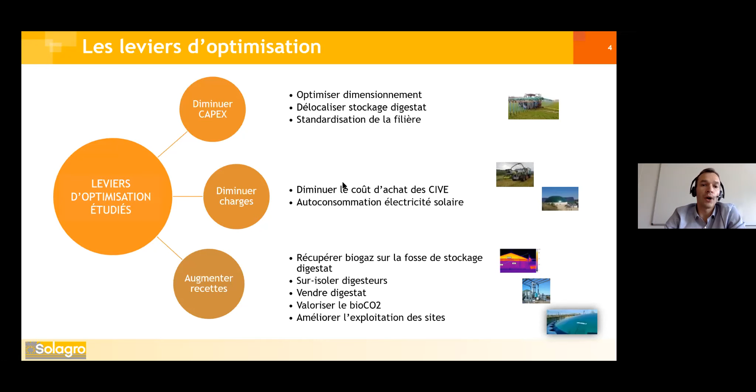Now, to understand the impacts of these different optimization points, we've worked on some standard cases, with ratios for investments, load, revenue, so different standards concerning inputs and technology. Number one, for example, this corresponds to 11,000 tons, diversified application, with manure. You can see the amount of methane that would be injected, 80, and a project that without a subsidy, in conditions of the purchasing price, well if we signed the contract in 2022, it's not at all feasible without using some kind of driver.

So this is a basic project, but we can test different drivers using this project. The second standard case, 24,000 tons this time, so 120 cubic meters in terms of injection. So we've got different types of manure, different types of animal waste. So think of the scale. So we've improved things. We've got internal profitability from the invested capital. In this case, that's another driver.

So case 3, 36,000 tons. So this is the limit of our authorization, with half liquid manure, half intermediary crops, with injected gas, again in liquid form. So at 4.7%, the result is better.

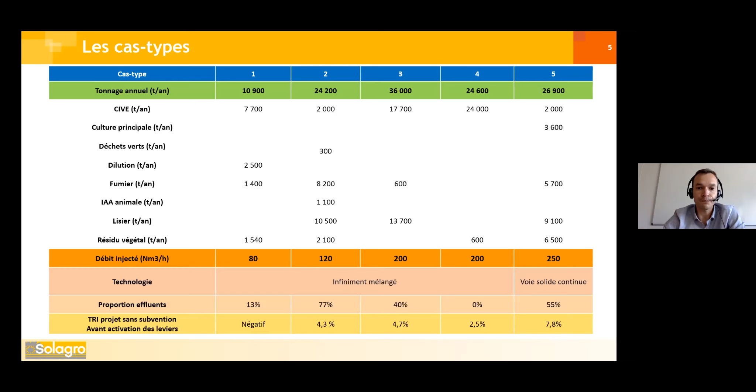So next slide, please. So once we've tested everything, the 12 drivers that we worked with for the 5 cases, we've got this kind of diagram that positions each driver on an axis. We've got the impact on the TRI, and the impact of the driver on the capex, on the investments, whether positive or negative. The area covered by each driver depends on the amplitude of the financial impacts on each axis for the different standard cases. So according to the standard case considered, we've got an impact that can be positive or negative, more or less advantageous.

There are certain drivers like use of insulation layers or a gasometer. That's quite close to the intersection of the two axes. This represents a low investment. There's little capex, so this means a better TRI, and as the return time for this investment is 3 to 4 years generally, according to us, it's advantageous. It's a good idea to use it to have a more sober installation in terms of energy use, so it maximizes its energy efficiency in terms of the gas injected into the network. So it's not a driver that alone would allow for something very profitable, but it's one of the components of a more relevant kind of project. So economically, it's advantageous.

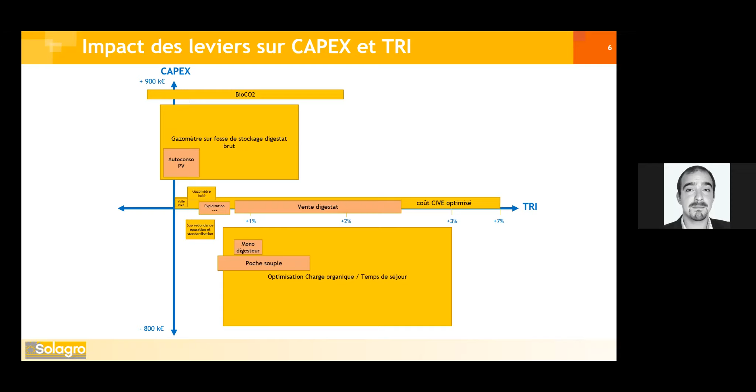So just a couple more minutes. Yes, certainly.

So this is a summary table of the different drivers that can be combined. So it gives us a debt coverage that is above 130%. So this can satisfy banks. The DSCR is the relationship between the BE, the excess, and the reimbursement of the debt. So it's the ability of a company to have an operating margin that is big enough to cover its borrowing. So if it's 130%, it means that even if the expenses and revenue are different by 30 points, the project can continue because of the time to pay back the loan.

The good news is that it's possible to have financial feasibility for all standard cases. It doesn't matter what kind of cubic meters we're talking about. So we've given priority to the most realistic drivers, the simplest ones to implement. So we've got 8 drivers for small projects for 80 Nm3 per hour. If it's not possible to achieve 15%, it's better to look at sale of digestates or at how to use intermediary energy crops, or the use of external funds so that there isn't too much payback time for the loan.

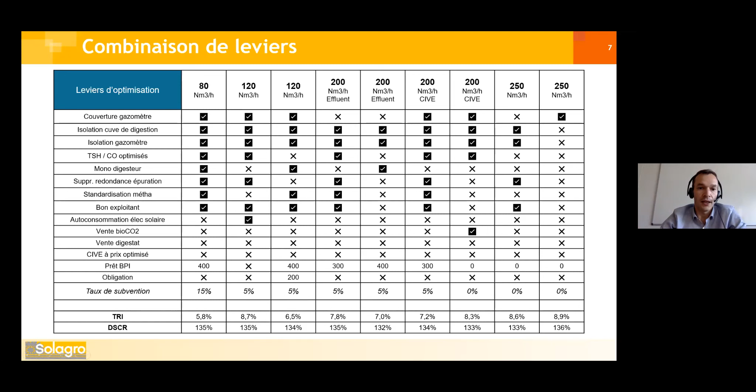So for 250 Nm3, we're looking at 8.6% in terms of efficiency. So by playing with the different parameters, you can find the right kind of efficiency. So we've talked about sale of digestate, but this has to be analyzed on a case-by-case basis. It's very theoretical. So we haven't applied any ADEME subsidies or regional subsidies. This would mean adding a specific factor.

So you can have combinations of enablers to provide profitability for the different standard cases analyzed. Some enablers, some drivers require additional investments and therefore more equity. That's why it's important to look at co-financing solutions with participatory funds or institutional funds or even private funds to diversify the situation. And then there are enablers that involve all sector stakeholders, design offices, etc. Everybody is involved in the activity. There we are.

Thank you, everybody. Thank you, Jérémie. Thank you for shedding light on that situation. So these are ideas that should be investigated further. There's a question about performance.

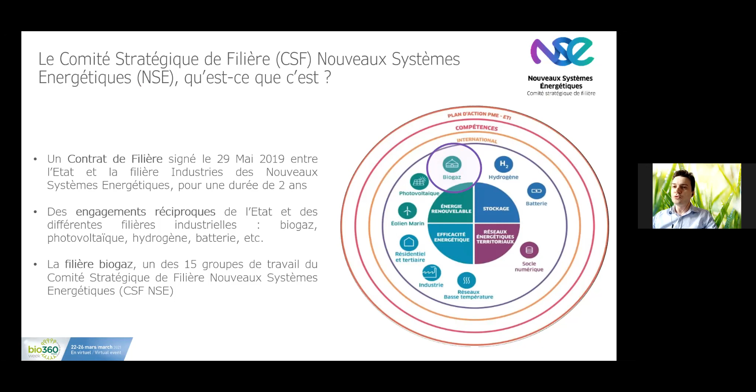So very briefly, let me go into detail on what the Sector Strategic Committee is all about. Since May 2019, we've had this committee in place, and this has been formalized by the signing of a contract between the biogas and methanization sector and the state. And we have a certain number of commitments regarding how we can monetize the externalities and also all of the different efforts we can make in terms of innovation.

Within the scope of this, we have a specific industrialization working group that aims at structuring the sector through innovation, looking to guarantee competitiveness. And we're looking to find tangible pillars that will enable us to invest and know what we're investing in. Now, this industrialization working group is open to all of the methanization actors and all those actors who would like to contribute to the building of this work. There are many actors who are already involved, but it's a very open-ended organization. So anybody else who would like to join can.

To move on, why is competitiveness so important? Why is innovation important? Well, because we've got over 8,000 production sites for biogas in France at the moment, but there's a massive queue as well. There are people banging on the door, literally. There are over 1,000 projects for gas injection.

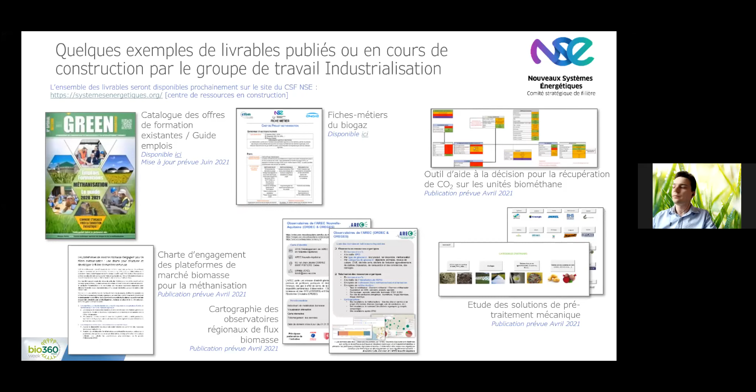Now, another point I wanted to stress was an approach that is underway. It's a cross-cutting approach that we share in our different working groups, whether it's for valorization from CO2 to biogas or the entrants. We basically want to highlight the approach that is called the design to value. There are other sectors in the automotive industry and the nuclear industry that have used this approach,

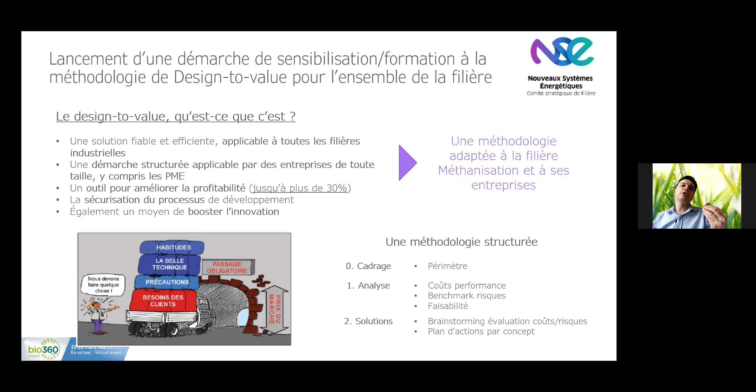and also a certain number of companies have applied this, and we're looking to apply the design to value in the methanization industry because it enables us to valorize and showcase our product, to guarantee that we structure everything we do more successfully. So through this industrialization phase, what we want to do is to enhance the democratic nature of this approach for each of the actors. We're basically saying we've currently identified that there are lots of levers out there, but maybe you, the actors out in the field, the OEMs, or all of the people who exploit and run the methanization plants, you too can think about your own ways of reducing the production costs.

And in order to implement this approach and to guarantee the democratic nature of this approach, we work with Utisa. Utisa is a firm that is specialized in design to value approaches. It's basically all about value analysis. And so what we're doing is we're giving access to this approach via webinars, online conferences that last for 2.5 hours. There are 8 of them.

You can sign up for a conference. You just type methanization and Utisa on Google, then you fill in a form. The initial sessions are already full, but there are still 8 remaining sessions that you can sign up for. It's open to anybody and everybody. It's totally free of charge. And it means that each actor who is interested can basically buy into this kind of approach to the sector. There you are, Mickael, that's all I wanted to say.

Voilà, merci beaucoup, Sylvain. Thank you very much, Sylvain. Just a quick question concerning design to value. What about the training courses? You said it's open to operators, to professionals who work in the sector, people who work in the construction sector. Have you got typical profiles? Yes, maybe I was a bit too quick. I only had 10 minutes, so I didn't go into detail.

Who are the main actors for whom this design to value approach is valid? Well, it's mainly those who build the methanization units, the OEMs, the design and development offices as well, that can be very interested in this approach. Also the operators, the project owners, because all the questions in these training sessions can be very relevant. It's important to optimize the project products, whether it's the CO2, the methane, or the digestate. And the same is true as well in terms of the costs and in terms of cost reduction.

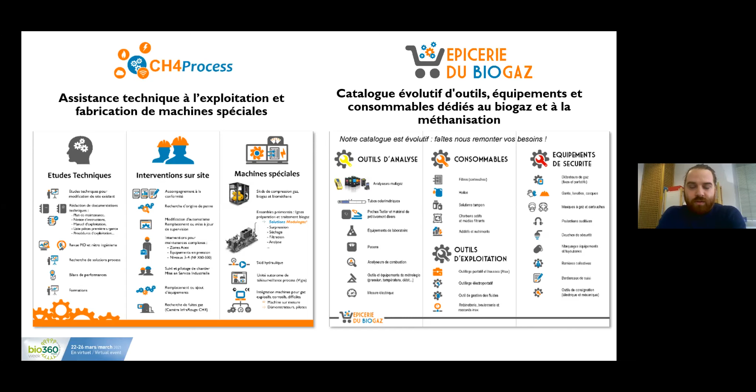Another specific feature is that we propose all of the tools that can be used for performing the analysis. And so we've set up a brand so that we can manage all of the trading part as well for consumables. If you have any needs in terms of analyses on consumables, it's not our main target, but we have a certain amount of know-how. So that's what I wanted to say by way of who and what we are.

Well, why am I speaking today? It's because we're working with AAMF and GRDF to work out whether or not it's possible, when it comes to optimizing the cost of the installations, to work with specific specifications so that as many design and development offices as possible can intervene to see how we can make savings on the maintenance costs and on the electricity consumption side of things.

So work has been done to draft standard specifications so that the operators can consult design and development offices, and our work was to test the solution on 2 sites to see whether the specs live up to their expectation and whether they actually help.

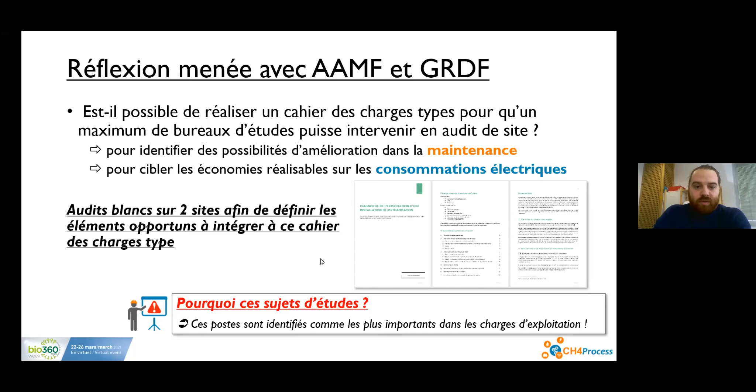What is important before we go into detail either on maintenance or the electrical consumption is to prepare the audit sufficiently. When we work at the different sites, we've realized that often what's important, first of all, is to spend time collecting information. This can take up an awful lot of time, and for an operator, before they call people to come and work at their site, it's a good idea to gather together all the documents that might be of use. All of the data has to be up to date.

The electrical diagrams, for example, the prevention plan is important. If we send somebody to your site, you have to provide them with all this information. And if possible, it's good to give all this information in advance, sending by email. Why? Because all the work that can be done over the phone beforehand to prepare the intervention on the site simply saves on time.

And it means that when we get to the site, we're not discovering everything. We've already got a lot of information that we've been able to prepare. I stress this because this is a point that is often neglected. An audit is a good audit if it's well prepared. Next slide.

Concerning the maintenance aspects, let's have a look at the initial operations that we've been able to carry out. First of all, we identified the critical equipment.

There are different ways of doing this. We, for example, used the PIEU method. It means that when you visit different sites, for each type of equipment, you can allocate a score, and that way you see whether the equipment should be considered critical, ordinary, or non-critical. There is a grid, an evaluation grid with a certain number of points that can be used. You can see how important the equipment is, whether it's likely to break down, and the degree of wear.

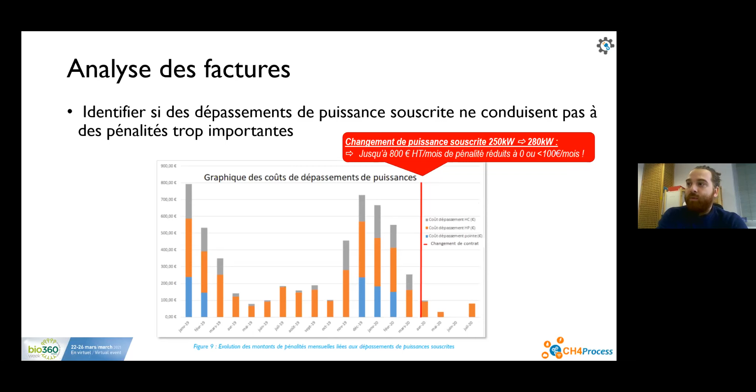There's another aspect that's important and easy to look at: the CSPE, whether you can be exonerated in France or not. The CSPE is a contribution to the public electricity service, and units that produce energy can be exonerated from it. It's important to be careful because when you have methanization related to a farming activity, only a percentage of what you produce can be exonerated.

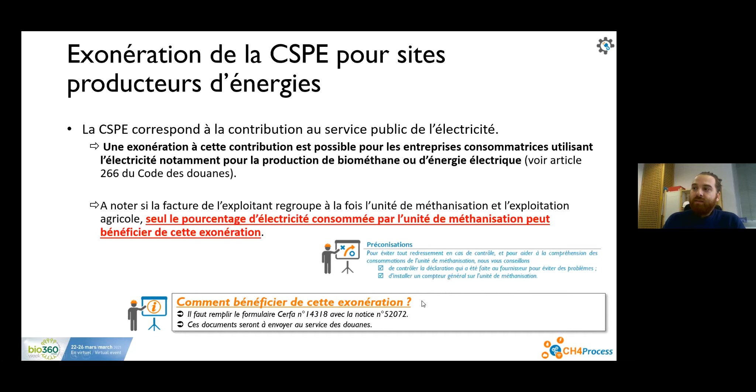But this disappears pretty much once you've changed your contract. So these are two ways of adapting so as to make considerable savings. I repeat, this is why you need to check that you've always got the right contract.

Your electricity contract has to be fine, not only during the startup phase of the unit, but 3 to 5 years later, you might need to ask yourself the question, should you change your electricity contract? The rules might change, your consumption might have changed. It's all important.

So we also performed a certain number of electrical measurements. This was much more focused. Here we could measure the energy consumption. We've got cases that record the consumption by different machines, and we measured the cycle for each of the machines, the effective power, the installed power, and also the intensity at the different phases. That way we were able to identify where there were any gaps.

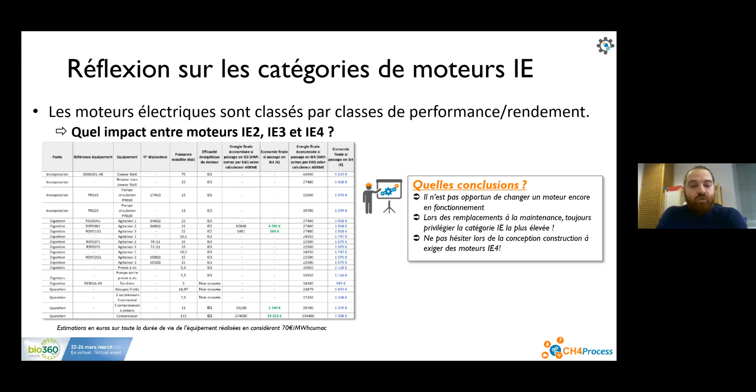But when the maintenance team arrives on the spot and when they're looking to potentially replace the motor because it's been damaged, then it is important to stress that you need to have the highest category possible, i.e. 2, 3 or 4. And for those who are still looking to design a site, it's important maybe to pay a little bit of extra money that the builder will request for an IE4 engine, because the impact on the site will be quite major over the years. The impact will be quite major, but it's not sufficient to say we're going to change the motor, replace it if it's already up and running.

Okay, just very briefly, we have a certain number of examples of anomalies or areas where we could optimize what we do, thanks to the maintenance analysis, but thanks to our analysis of the electrical consumption. We noted that in 2 sites, 2 of the stirrers used a massive amount of energy, and that particularly during the startup phase, they consumed a lot of electricity.

This can come from the fact that they've been poorly adjusted at the level of the speed drive. It can be due to dirt that has got into the vat, but basically this simply enabled us to say very clearly, these 2 stirring devices are the first 2 things that are going to break, so that's why they need to be monitored.

Next, there's another point that was quite interesting, and this was worth several thousands of euros potentially, or even more. We were able to observe that the gas compressor used too much electricity, and when we looked very closely, we realized that one of the safety valves, the pressure safety valves, was leaking. And once you've got a safety valve that is leaking, well, you have to work upon the leaks. And we saw that we went from 76 to 72 kilowatts. So hence we avoided part of the gas from being lost.

This is an important issue because if you're able to analyze the different types of energy consumption and what is not normal, you can make savings directly by correcting things. We could have used an infrared camera, but what we often see is that there are leaks from these outlets, these safety valves, and you can't necessarily send in an infrared camera, not into the hot gas anyway, but you can still potentially have the problem. This was interesting, quite an unusual problem, but it's the kind of thing that we identified as being a potential problem.

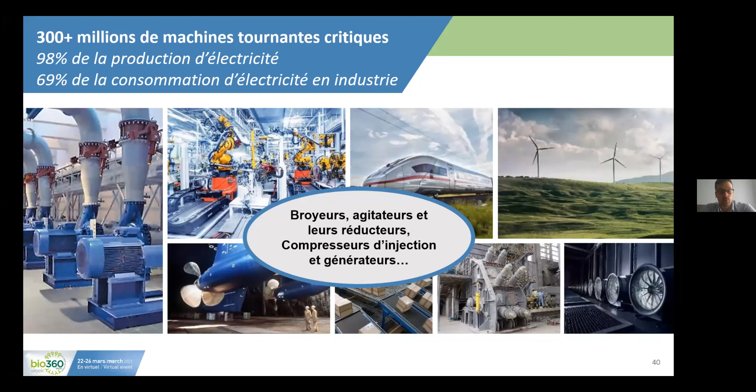And on the next slide, we can see some of the figures based on a wind farm. There's usually very good availability, 97% availability. So 97% of the time they are running, but there is time where a wind turbine is not working.

And there are a certain number of unplanned events, so generating different emergency actions with parts that have to be changed. And this means that electricity cannot be produced. So if we transpose this problem to biomethane, similarly, there are going to be a certain number of machines that are critical and others that are less critical. So there's a matrix that was presented with the machine criticality just before. So it's a good approach to have, to know what machines are critical for your operation, the ones that are going to cost the most to repair.

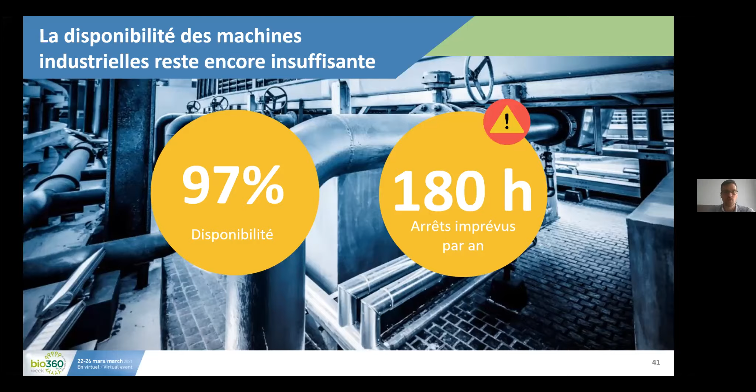So there are a certain number of alterations linked to the state of health of the equipment that is being measured. So it may be linked to the state of health of the electrical part, so the electricity, speed drive, a stator that's damaged, or you can have alterations linked to the mechanical part of the system. And I'm going to go into details in the next slide. So everybody's saying, oh yes, it makes sense. You know, I realize that I can monitor the electrical health by looking at these signals,

but for the mechanical side of things, for the bearings or alignments, here's an analogy that we often use: the cyclist who has a wobbly wheel. So the cyclist will feel that the wheel is wobbly. So it's something that he knows is there, but he has to push a little bit harder with his legs, so provide extra torque. And this is what happens in a motor, basically. For example, if the machine is slightly off, it will have to provide higher torque. So that's what we're measuring in a very specific manner. So we look at high frequency and high resolution to do this.

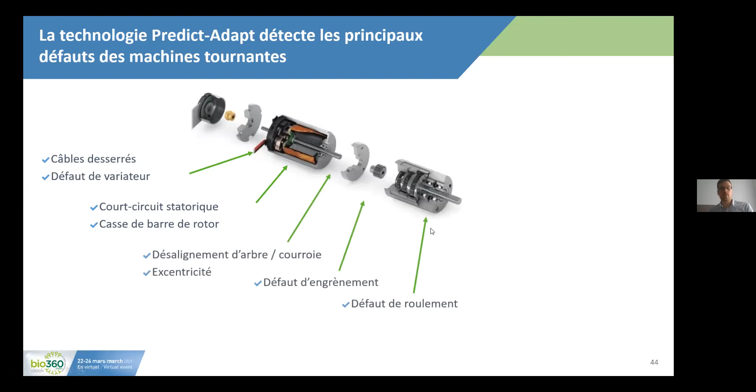So on the next slide, as we will see, there's a whole range of different signatures that we are familiar with, that are pre-established. They allow us to identify the start of breakdowns like electrical signals. But if we continue, we can have mechanical signals and process signals for certain machines. So for example, here, if you look at the last part, we've got cavitation that can damage pumps.

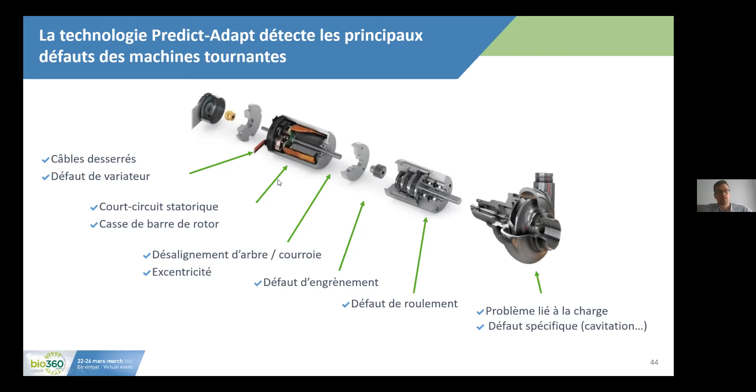So the idea is to detect the precursor signals, so defects in bearings, for example, and then let the operator know, give them notice and give them the opportunity to organize maintenance operations, keeping in mind that there are some defects that can get worse very, very quickly. So that's the idea, that's the challenge that we wanted to tackle, to give a sliding rule for these different defects.

So you've got a physical part, you've got the machinery, you've got three current transformers that are fixed around the power cables of the machine. And then in the electrical cabinet, you install an electronic box. It takes just 15 minutes to install. You don't necessarily have to stop the machine. It really depends on the machine.

And then the box acquires current, and it processes the signals locally and then sends the indicators to our web platform. And this web platform is available to our customers. So the customer can view the state of health of the machinery, see how it's going, see what the trend is of the different health indicators over time.

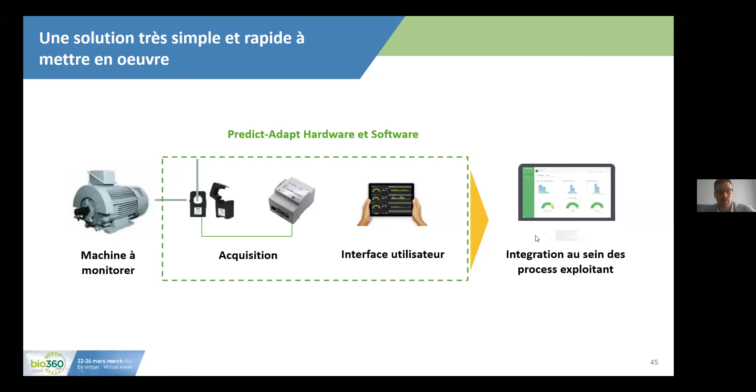So here's an example of this interface. So it's designed to be fairly simple to use. So we know what the machine is. There are gauges from 0 to 10, and they represent the state of health of some part of the machine. So there's a gauge, for example, for the bearings, there's a gauge for the stator health, and that gauge, if it goes into orange and red, that means that you have maybe short circuit problems, and that's something that has to be dealt with, because you're going to have a flash and the motor will stop working.

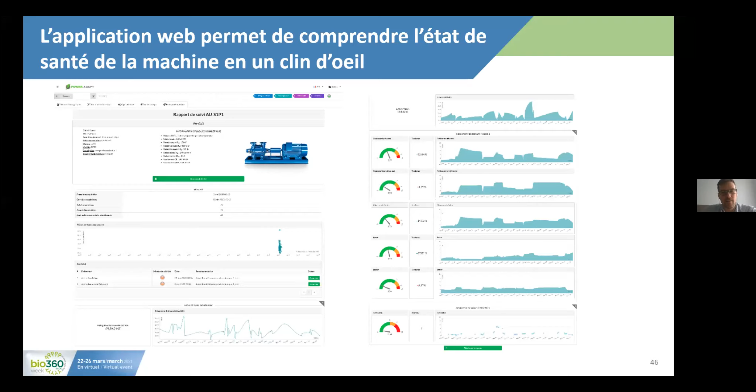So the solution, if we just want to summarize things on the next slide, please. So it's fairly simple, this solution. It's easy to install, it's easy to use, and it can be used continuously on a machine.

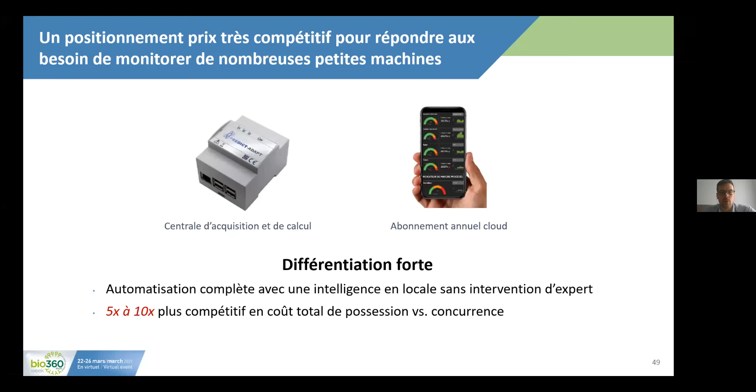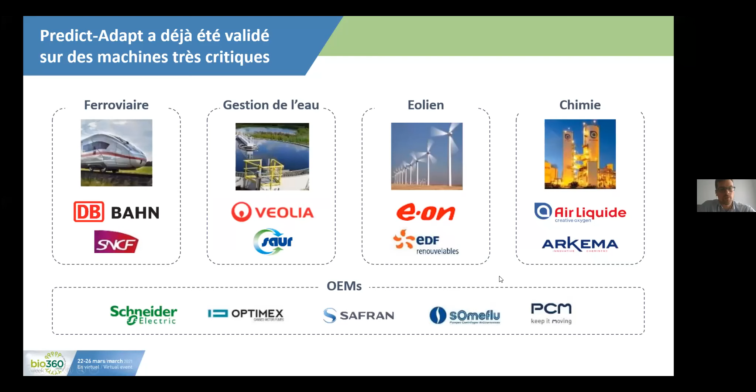What we're hoping for is different use cases. So if there's the start of a breakdown, an electrical breakdown, for example, with a flashover in a stator, we'll try and let the operator know ahead of time and say, okay, be careful. We're seeing some short circuits on the stator. There's something that needs to be changed.

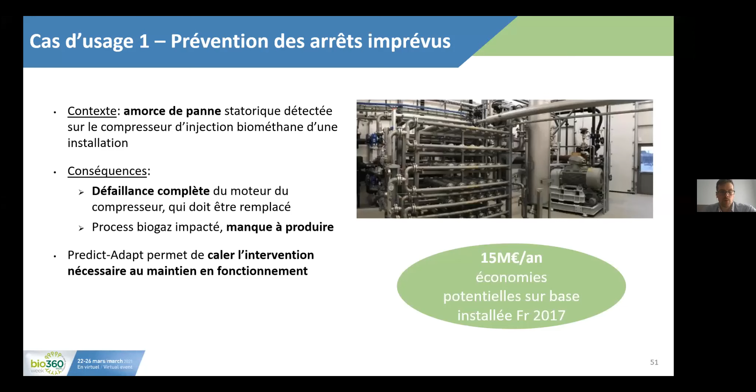So if we extend that to the whole sector, certainly there will be economies of scale to be had. And of course, we have to know the details of each installation. But one thing is sure, if you have a production shutdown that lasts for several days, installing this kind of box will be very quickly amortized. So I'll finish now with the increase in the load factor of an installation.

So this brings us to the sector. There are a certain number of installations that had a load factor that was high and that was due to go higher. And when it's increased, the organization in charge of operating and maintaining the installation is going to have to be very attentive to these machines that are working a little bit harder. In this context, our boxes can be a good solution for safeguarding the machinery, making things just a bit safer. So for those that want to produce more in the future, it's also a useful addition. So I've finished with my presentation.

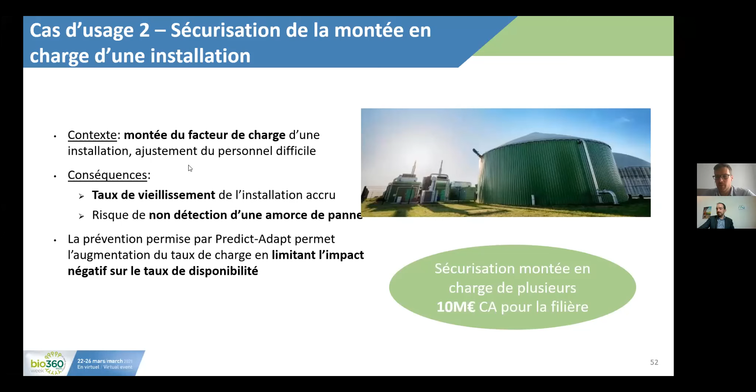Yes, that's right. So thank you for what you have presented. It was very clear. You talked about working with OEMs from industry. Are you planning to work with OEMs specific to the biomethane sector so that products are as perfect as possible, so that they can improve their products and operate the boxes on their units?

Yes, that's exactly it. So we want to distribute the solution, and we've got a method to do that. Today, we haven't yet got an OEM catalog for this sector, but we're trying to systematize the approach for OEMs. So hopefully we'll be able to work with this sector in the future. Let's take a compressor. Maybe we'll be able to offer the solution for the compressor that will then be integrated with the machine that's ready to use.

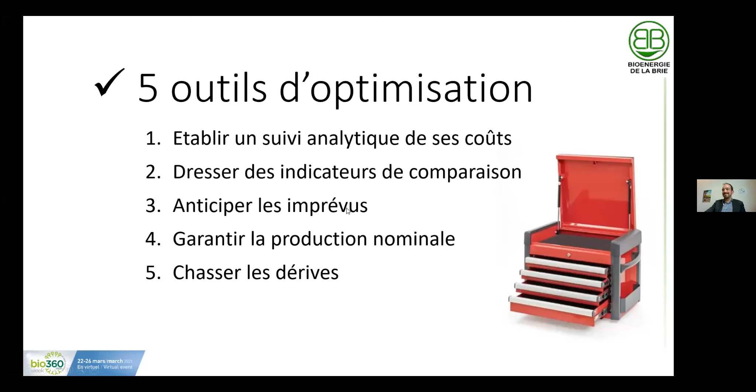So this is the testimony of an operator, a member of the AAMF, so an agricultural methanizer in France. So we were able to have exchange, visibility and feedback. So I'll just give you some very quick examples. Some tools that have been identified now. For example, we can have analytical monitoring of costs. We can have comparison indicators. This is very much based on procedures.

The sound has been cut off completely. Moritz, I think we've lost you.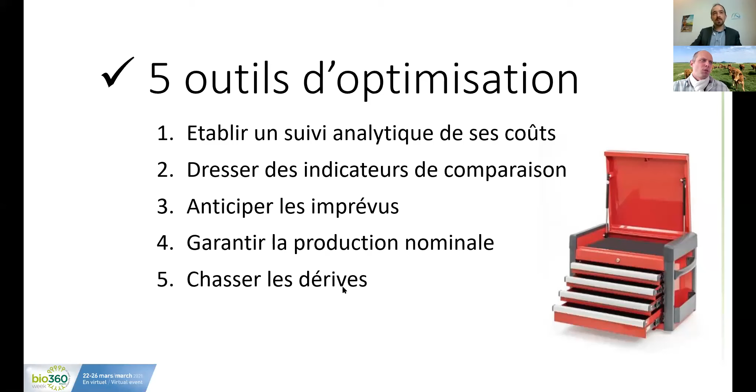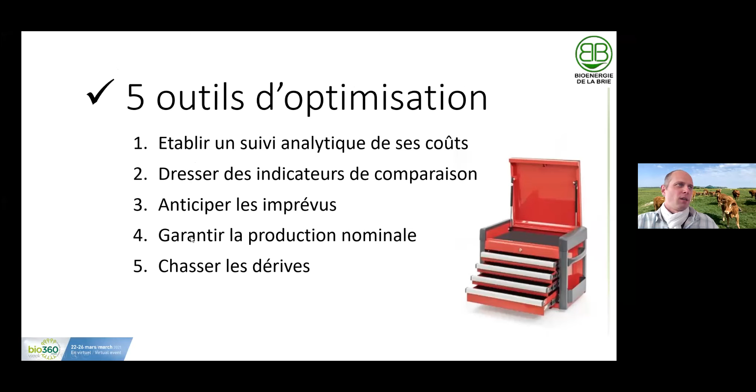That's right. Thank you for that reminder. So you've got to anticipate any unexpected events. The fourth point, guarantee that you've got nominal production, whatever happens. Well, there are many theoretical things, but in the field, things don't always work smoothly. So that's an important point. And the last point, make sure that you're not off spec, you don't have any drifts. Mickael, let's go on to the next slide.

So the first point, make sure that you have analytical monitoring of costs. So cost accounting. This is not something that's done an awful lot, but what's important is to have some kind of table, a very simple table, where you look at the costs in detail, where you spread them out per item. So separate out purification, gas production, etc. And if possible, for the gas production part, go down to the transfer, the incorporation, because the more details you have, the better idea you have where the problem comes from.

So the second point was brought up by Jérémie, is the cost of inputs. I listened to what Jérémie was saying. I'm not seeing any drop in input prices. There are specialists who have been out there in the market, who work in the animal feed market, and it's important to choose the right materials. It has to be methanogenic. You've got to have material that is perhaps more costly than others, but has a better possibility of producing methane. So it's a bit of a paradox.

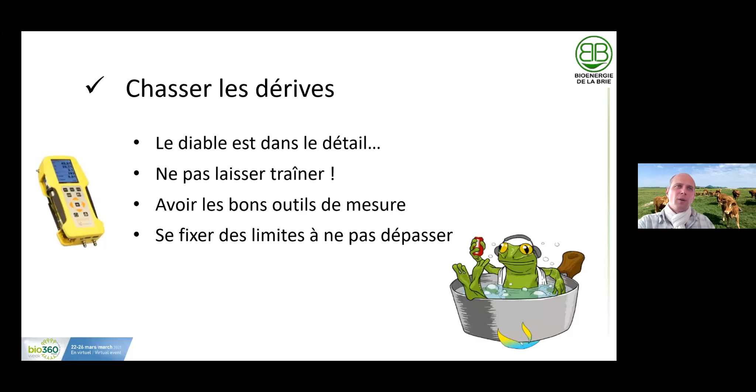Please note that it is anonymous, isn't it? Yes, absolutely. So anybody and everybody can take part. And as I said in the introduction, it's anonymous and all the questions are very specific, and it really does stay anonymous. The aim is to detect anomalies and to be able to reduce inefficiencies or excess costs.